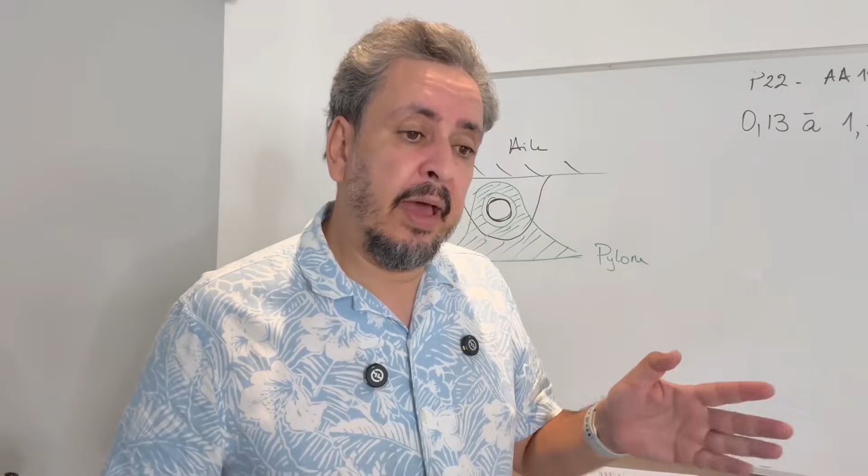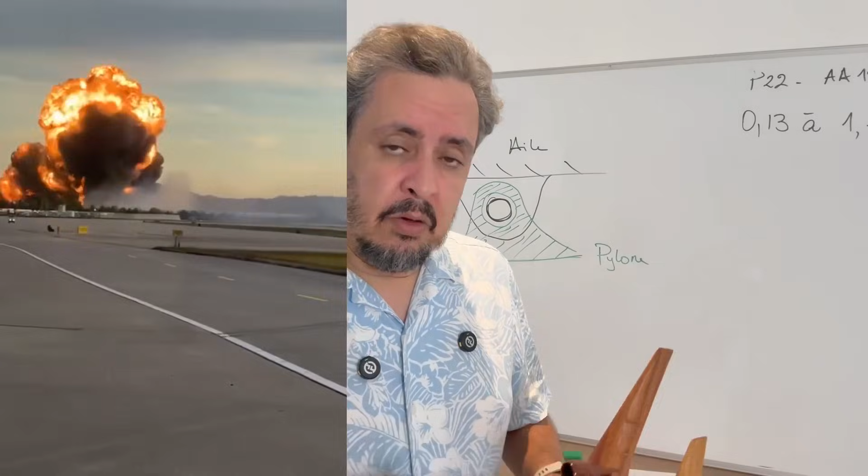My friends, good day. At the beginning of this month, on November 4th, a McDonnell Douglas 11 aircraft, a Trijet, belonging to United Parcel Service, crashed during takeoff from Louisville Airport. It was taking off from runway 17R, and we all saw the footage. During takeoff, there was a fireball near the left wing. The aircraft had trouble gaining altitude, and afterwards it came back down to the ground and crashed. It's a tragedy that killed 14 people: 3 in the plane, the co-pilot, the captain, and another extremely experienced co-pilot, plus 11 people on the ground, and some injured.

Since then, several things have happened. First, the Federal Aviation Administration has banned all remaining McDonnell Douglas 11s. I want to say they're all used for cargo now—today there isn't any airline that uses this kind of aircraft for passenger transport, so the companies that use this plane had to put it away. It's literally grounded. It happened so suddenly that, for example, there was a United Parcel Service McDonnell Douglas 11 that was taxiing to take off, packed with freight and everything. The guys get to the runway entrance, and then they receive a message telling them to turn around and come back immediately. The plane can't fly, so that's where we are.

FedEx uses the McDonnell Douglas 11 internationally, while United Parcel Service only uses it for local destinations in the United States. By the way, the flight was going from Kentucky, the United Parcel Service hub, to Hawaii, but still within the United States. At FedEx, for example, they use it internationally. I saw a picture earlier of a FedEx McDonnell Douglas 11 and it looks like it's stuck in Japan. So do they have other McDonnell Douglas 11s stuck all over the world?

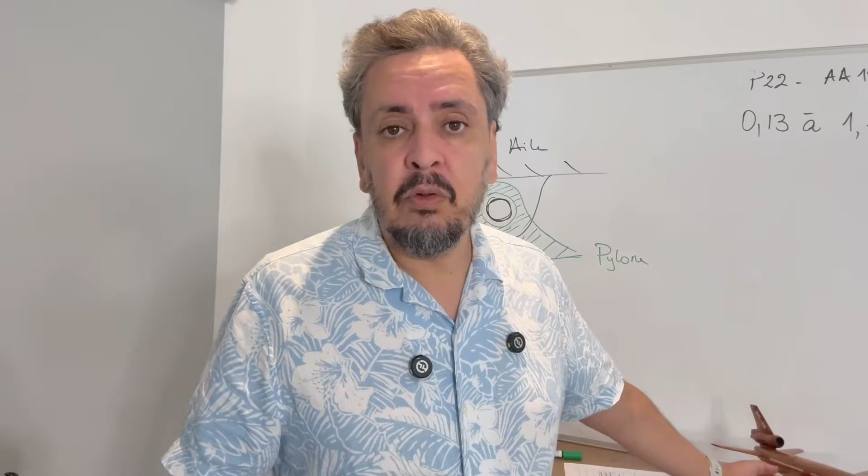Is it going to fly again or not? We don't know at this point, but it might be the end for that aircraft, because even before this accident, it was already heading toward the end. It didn't have many years of service left. Except that now, with this shutdown, millions have to be spent to get them flying again, to restore the safety of these planes and put them back in service. Is it worth it? A decision must be made, but sometimes it's not. If the plane only has 3, 4, or 5 years of expected life left, you're not going to spend millions to bring it up to standards so it can fly again. Maybe it's time to get rid of it.

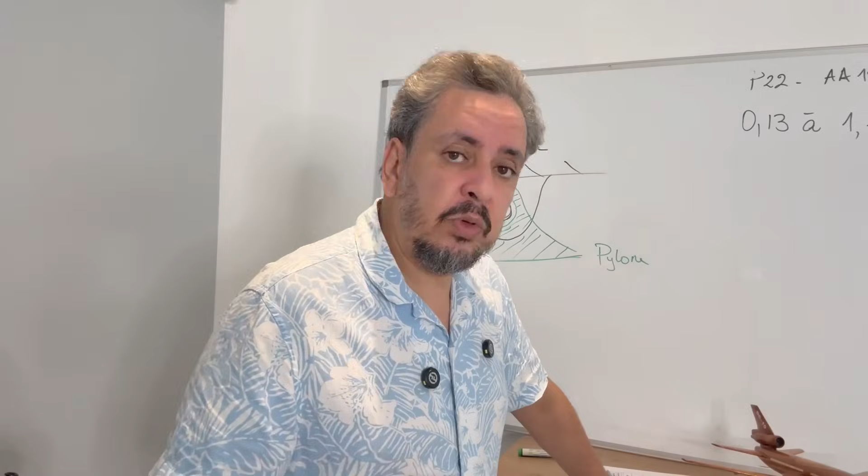An interim report was issued by the National Transportation Safety Board. It's a progress report, as they say. At this point, there's no analysis or explanation, just the first elements of this investigation given in bulk. We know today that during the acceleration, it happened completely normally—the aircraft accelerated along runway 17R completely normally, up until the moment of rotation, the moment when it lifts its nose. At the moment it lifts its nose, the wheels leave the ground.

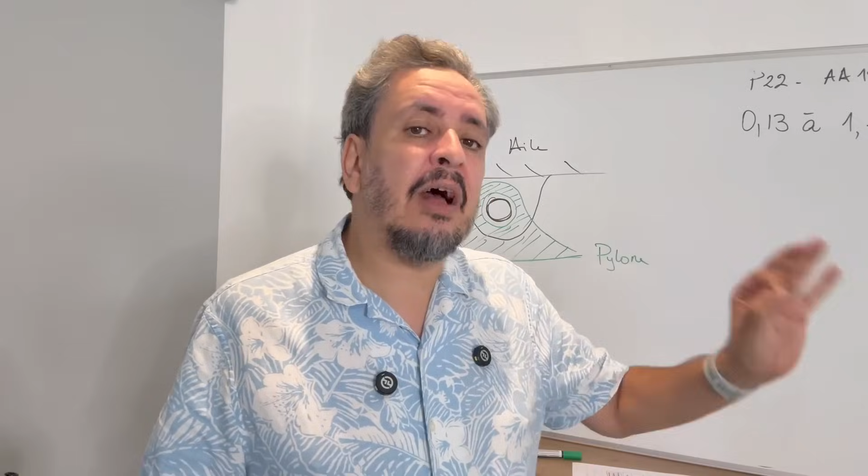And then the left engine comes off—engine number 1 tears away. A key detail is that it detaches with its pylon, which is actually the opposite of what you might think: it's not the engine itself that tore off, it's the engine's pylon that tore off from the wing, so the engine left with the pylon. You can see it rising almost vertically, flipping over the wing. It goes up almost vertically because it still has a bit of residual thrust. It's on fire, that's fuel. Then it goes above the height of the vertical stabilizer, the vertical fin, and falls back down afterward. The plane reaches about 10 meters or 30 feet according to the National Transportation Safety Board. It reaches the end of the runway. There's a barrier that it's going to fly over, but it won't be able to climb much higher.

A few questions remain, mainly why this engine tore off during takeoff. We remember, for those who saw the video about 2 years ago, American Airlines Flight 191, a DC-10. The McDonnell Douglas 11 comes from the DC-10—it's a stretched, modernized version with a lot of the same technical choices. At the end of the 70s, there was this DC-10, American Airlines Flight 191, in Chicago. During takeoff, at the moment of rotation, engine number 1 tore off in exactly the same way and flipped over the wing. The aircraft then stalled. There was maybe a small detail I mentioned last time: the leading edge slats retracted, and then the pilots followed the procedure, and that's what actually killed them.

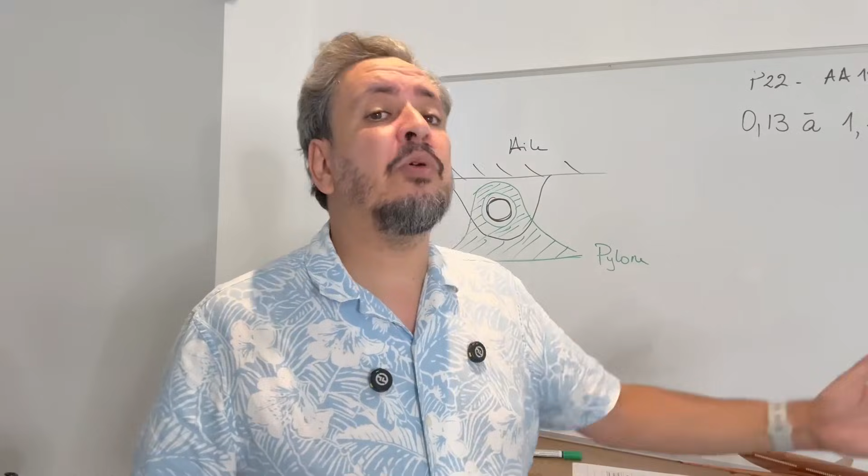But they would have needed to know, they didn't know, they would have needed to know the extent of the damage. They would have needed to know that the slats were retracted. They would have needed to know the engine was gone. But you can't blame them for following the procedure that was published at the time, for following their training.

But the fact is that in theory, this crash of American Airlines 191 was not absolutely necessary. It wasn't mathematically necessary, it was avoidable. Except when you add the layer of procedure on top of it, there you go. It caused a disaster with, if I recall, 271 deaths. It's the most serious plane crash in United States history so far.

I was saying that during American Airlines 191, the engine came off during rotation. On the UPS plane, the same thing happened at the moment of rotation. The engine tore off. Why exactly at that moment?

Actually, it's very likely that it's an effect of torque or gyroscopic force. Why? Let me tell you. Maybe I'll show you with a fan like this.

So here we have a fan. I won't turn it on because then the microphones will pick up only that. Imagine it spinning and I suddenly tilt it upward. This is a plastic fan, but imagine it's made of metal, really heavy and spinning very fast. Well, it has a gyroscopic moment, there's resistance, and when I tilt it upward, it will tend to move sideways.

Following at 90 degrees in the direction of rotation, you get the same effect if you take a bicycle wheel, hold it by the axle, spin it as fast as you can, and then try to tilt it. Change the axle's direction and you'll see there is a tendency, strong resistance, and resulting lateral forces. So that's a gyroscopic effect.

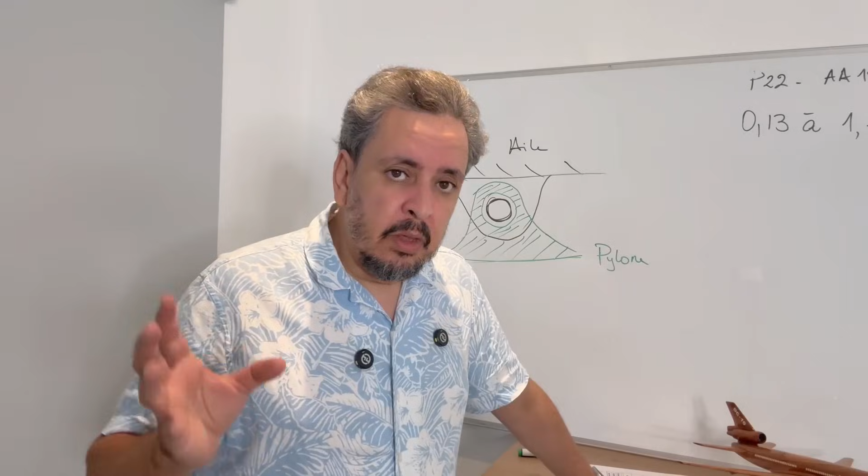The pylon attachments to the wing were supposed to be thoroughly inspected between 28,000 and 29,000 cycles. If we do a rule of 3, we see that it's a way of saying they should have been inspected in the future, roughly 140,000 flight hours, and the plane will probably be 50 years old.

A way of saying that they were designed to never be inspected, because quite simply, airliners never reached that number of flight hours and that number of cycles. They are taken out of service for other reasons long before they reach those theoretical values. So, in reality, McDonnell Douglas had designed these fittings so that they would never be thoroughly inspected.

Yes, regular visual inspections occurred, including one in October, as noted in the interim report. But the fact is, the really thorough inspection was just purely theoretical.

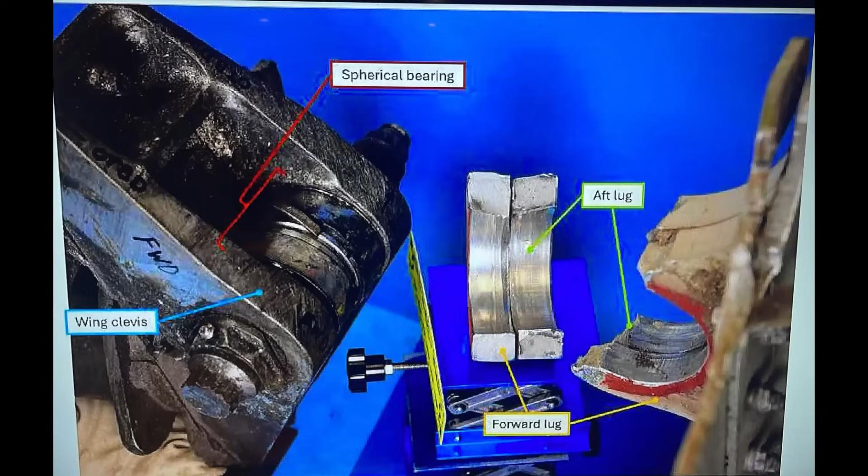What happened? Here we have some extremely interesting images in this report. It's that the reactor, or rather the pylon to which the reactor is attached, broke. It broke a retaining ring, you see. And then from there, the rest followed in a chain reaction.

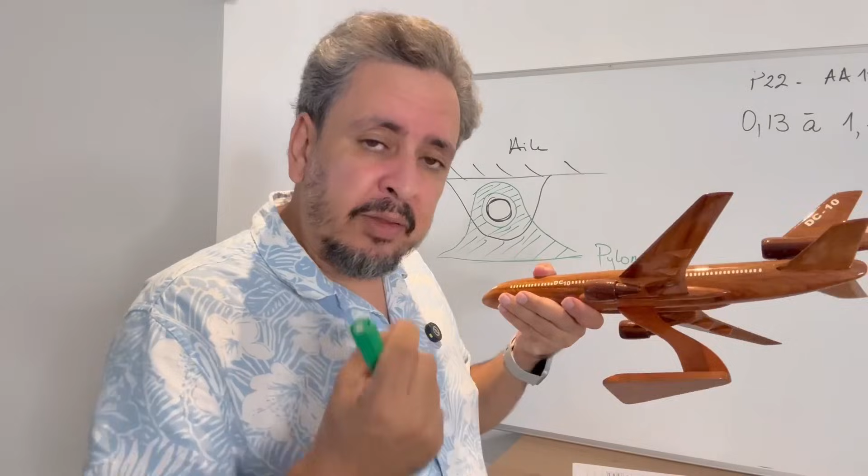So just to show you how the reactors are attached: you have the pylon, which actually attaches at 2 points. That means first the reactor is attached to the pylon, but then the pylon itself attaches at 2 points - there's a spot at the back and a spot at the front. It's not much, just 2 places that allow the reactor to be suspended. This exists on Airbus and Boeing as well, but it's extremely small.

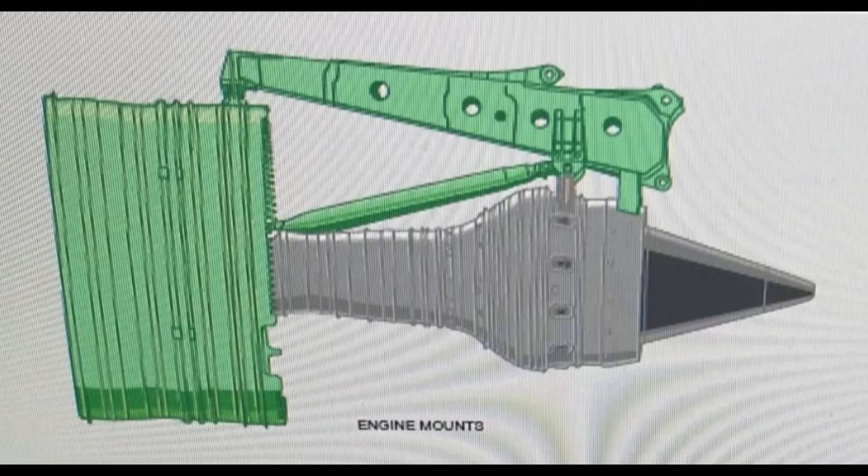There are thrust rods - rods that transmit the thrust. Because actually it works like this: you have the engine that's suspended, attached to the wing. That suspension is for the weight of the engine, to support the weight of the thing. On the other hand, an engine pushes forward most of the time, and pushes backward during thrust reversal.

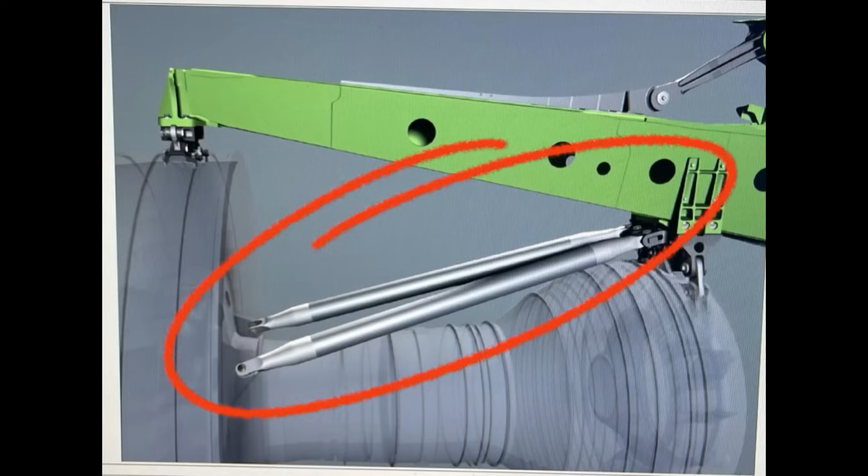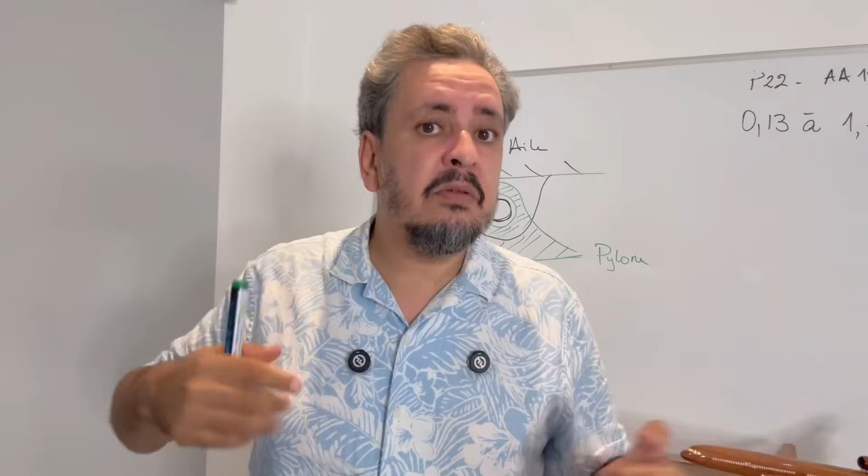And so here, there are connecting rods. They can be either 2 separate rods, or a V-shaped rod, like on the Boeing 787 - I'll show you the mechanism. These connecting rods are able to work when they're stretched, which is most of the time, or work in compression during thrust reversal.

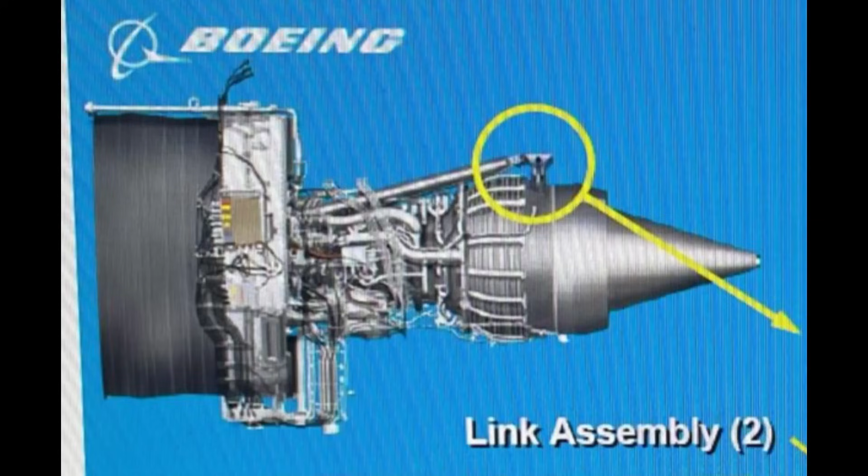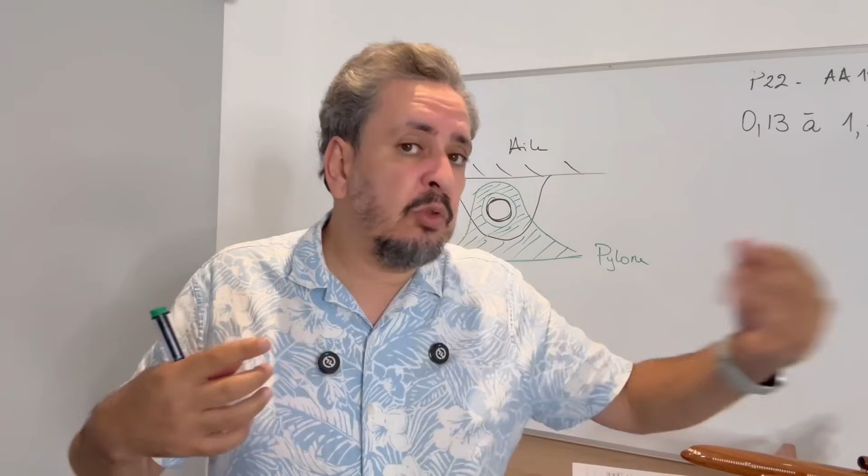These connecting rods attach toward the engine fan - the fan, the blower, that provides most of the thrust. So that's where we find an attachment point, right at the level of the blower. And we bring the bar up to the level of the wing structure to make sure it's secure. This bar will actually handle the axial part of the force, so the thrust from the engine is transmitted through this bar. Each one does a different job.

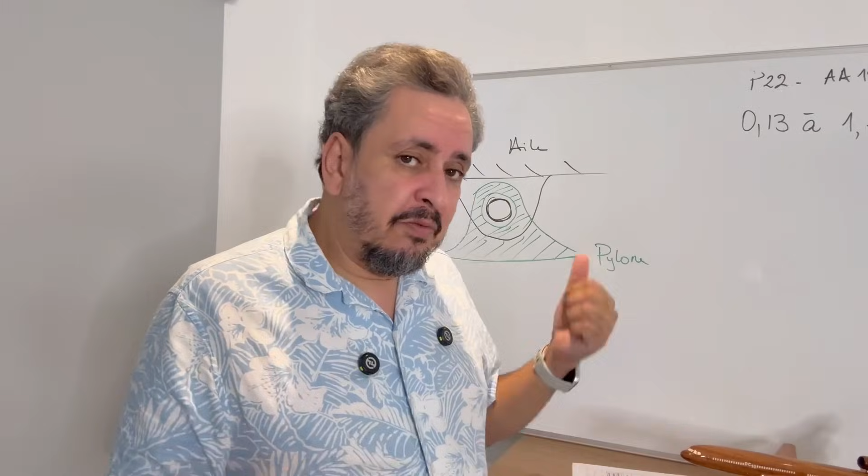The system that highlighted MD-11 comes from the DC-10, and it was already quite criticized back in the days of American Airlines. If you look at the accident report, page 22, the accident report of American Airlines 191, you will see that they describe a problem related to the assembly.

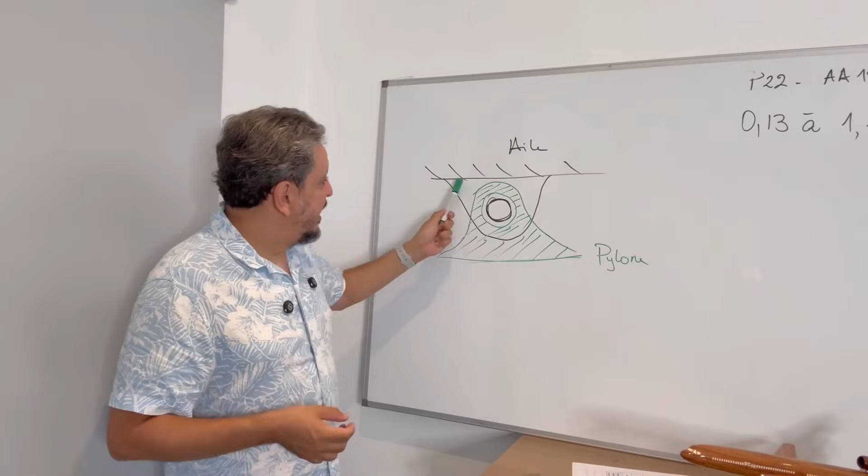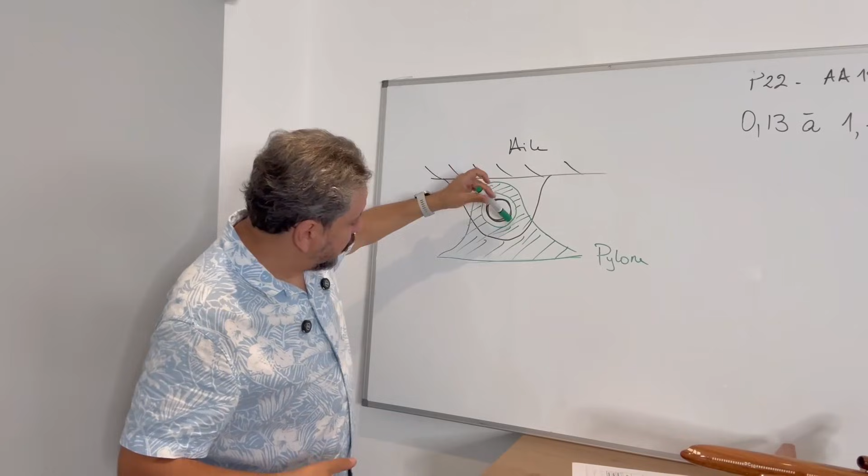When you look here, we have the wing - this in black is the wing, and we have this black part here that allows support of the pylon, you see? So the pylon has an axis here and there's a ball joint. Here at this level, there's a ball joint. Why is there a ball joint?

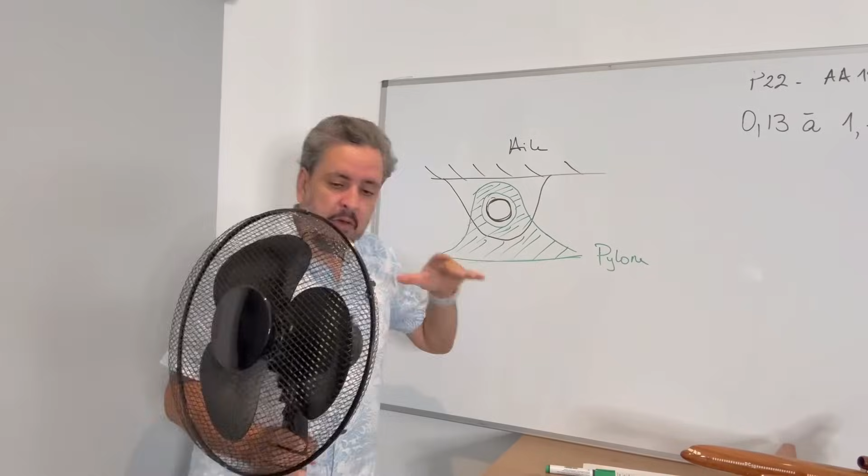The engine, just to give you a 3D view, the engine is like this, okay? The fan is like this - this is the fan. And then we have the pylon that goes up like this and attaches here, okay? In the diagram, we have this green part that belongs to the pylon and the black part that belongs to the wing structure.

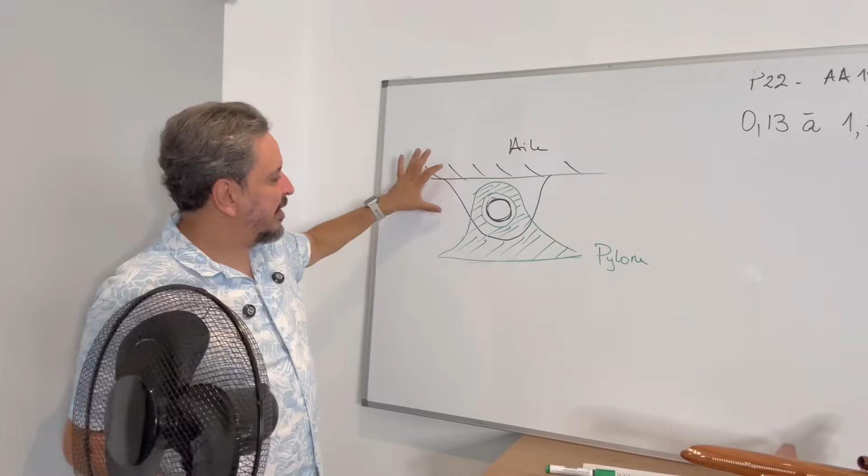And between the two, there's this ball joint assembly. So the ball joint assembly is what allows the engine to move a little bit.

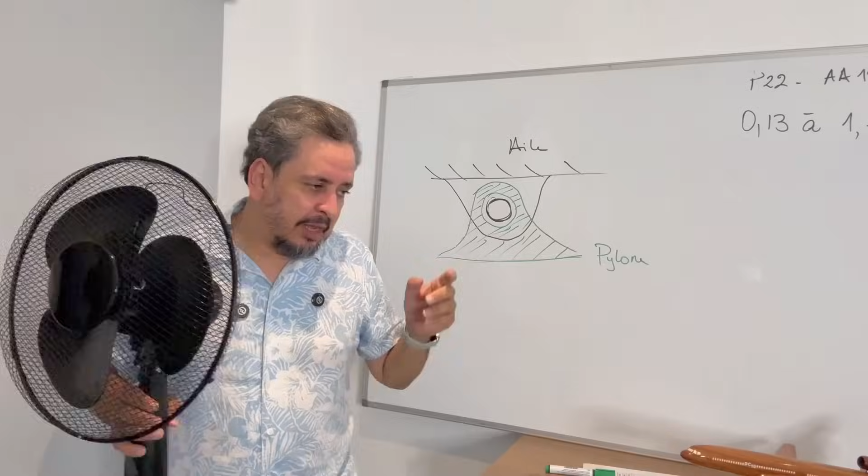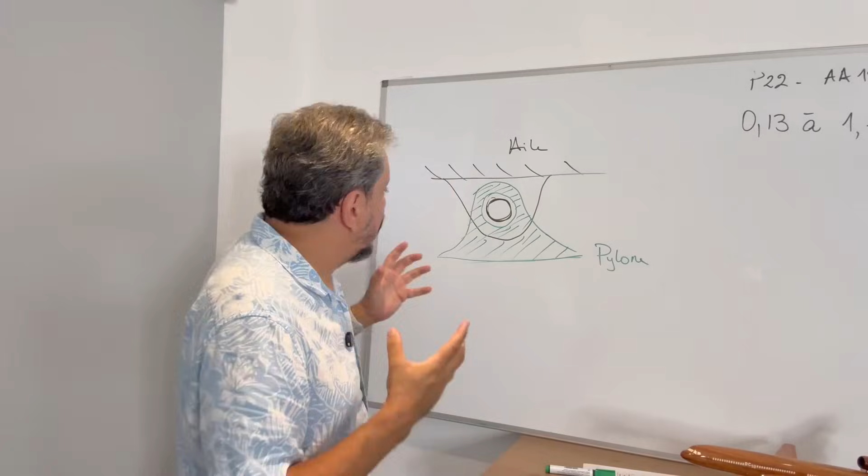You know, when you're on a plane and you look out the window, when there's turbulence, what do you see? You see the engine doing a dance like this, vibrating a little bit. And actually, it's not welded to the wing - it's not held by weld points, it's not really bolted to the wing. It's mounted on a ball joint to allow for some flexibility that lets it move both right and left.

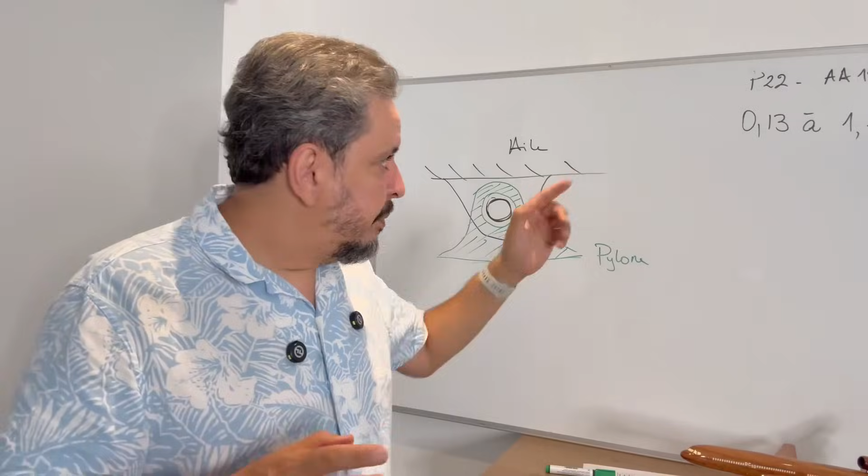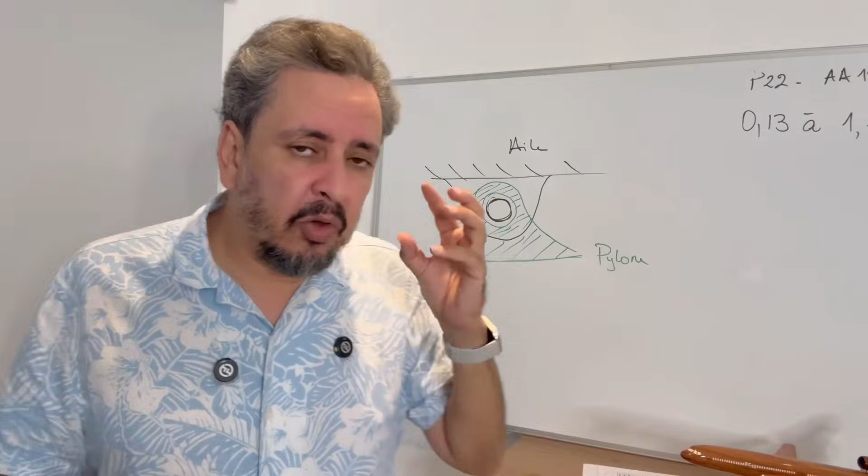That's a small rotation right at the wing pylon connection. So what they discovered back during American Airlines 191 was that this happened on a lot of planes. Since the assembly here doesn't have an extremely clear specification or tolerance from McDonnell Douglas, what was happening was that the distance here could sometimes decrease to the point that it could go further.

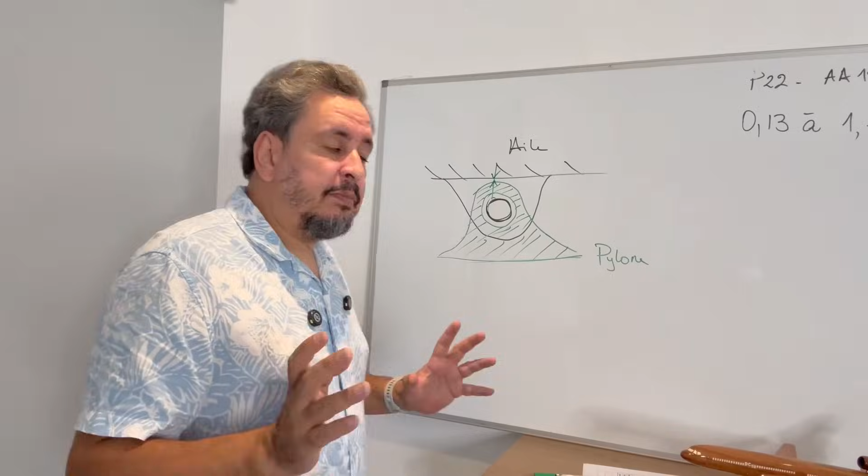When they checked on various planes, they found that it could range from 0.13 millimeters, so a tenth of a millimeter, up to 1.14 millimeters. So it could be between a tenth of a millimeter to more than 1 millimeter. It's still not very precise, you see - with this kind of engineering, it's not precise at all. So look at what happens in cases where the distance is extremely small.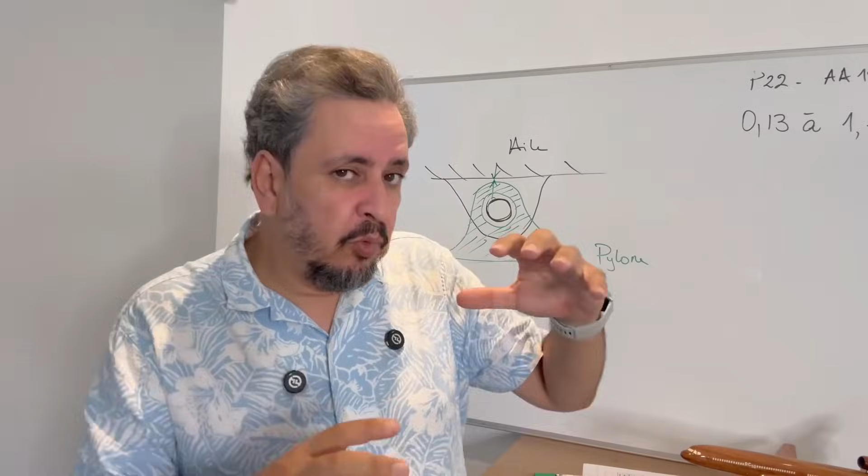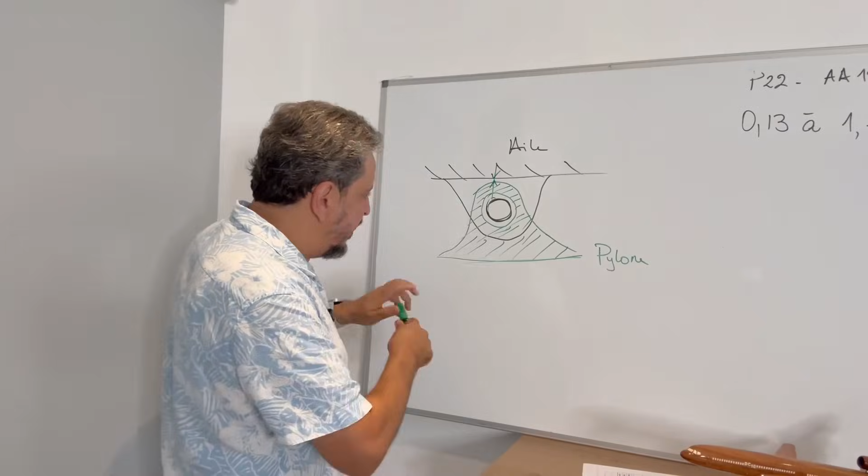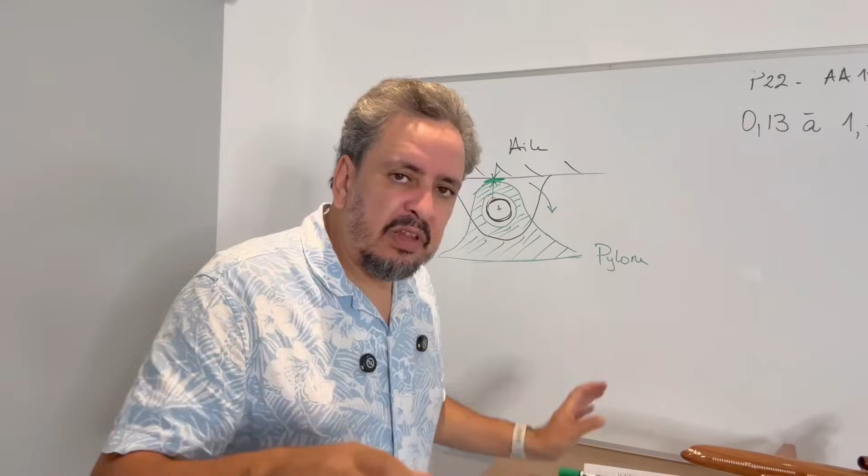These two parts, the green one and the black one, which are normally supposed to be able to move relative to each other along the axis, the ball joint, well, they can come into contact. We can have unwanted contact. So imagine the rotation here: this one turns like this, and imagine, for example, that this end comes into contact. At that moment, we no longer have that flexibility of rotation, of slight lateral rotation.

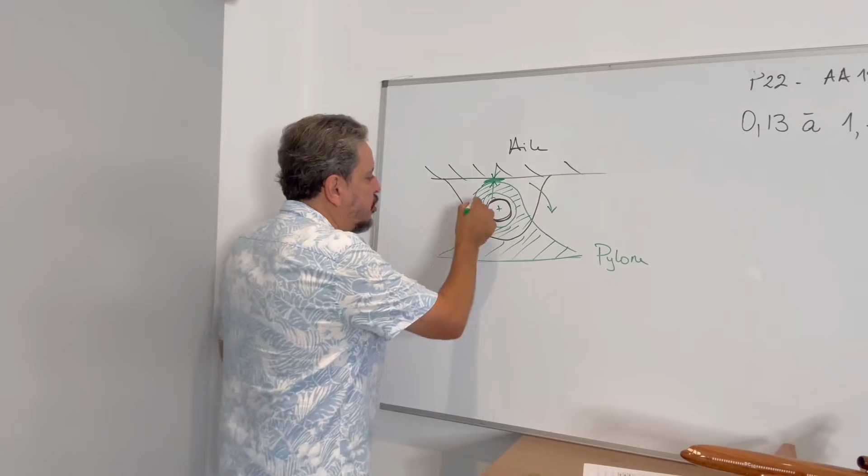So what's going to happen? There's a huge force, a huge pressure effort here, which will be transmitted along these branches and which could potentially break them. In fact, at the time both branches broke, they had been weakened by this, but also by the fact that American Airlines had used a hydraulic jack, a hydraulic forklift, to replace the engine. This, of course, badly damaged the mounts that were just waiting to break off.

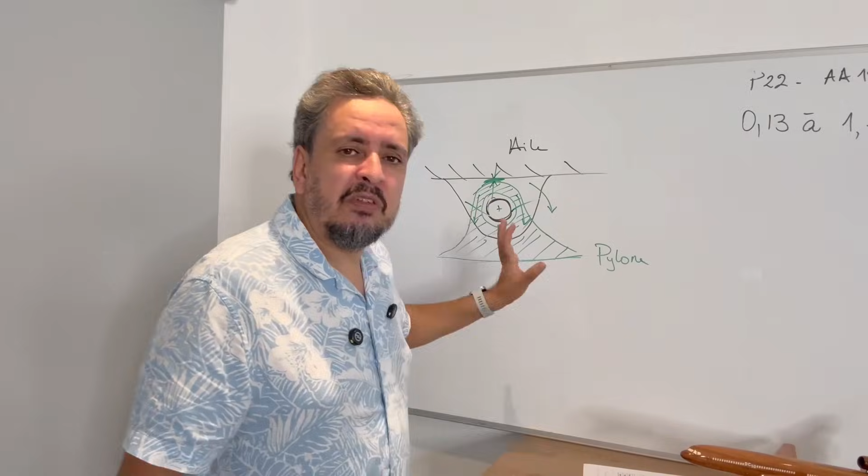By the way, the year before this crash happened, I think it was in 79, in 78 there was a similar accident at Continental. It didn't go as far as a crash, but at one point, while they were installing the engine, they broke the attachments. Normally this should have been reported to the aviation authorities because that's damage to the structure of an aircraft. But what did they do? They just repaired it there, replaced a number of parts, and covered it up. The National Transportation Safety Board blamed them for that in the report on the American Airlines 191 accident.

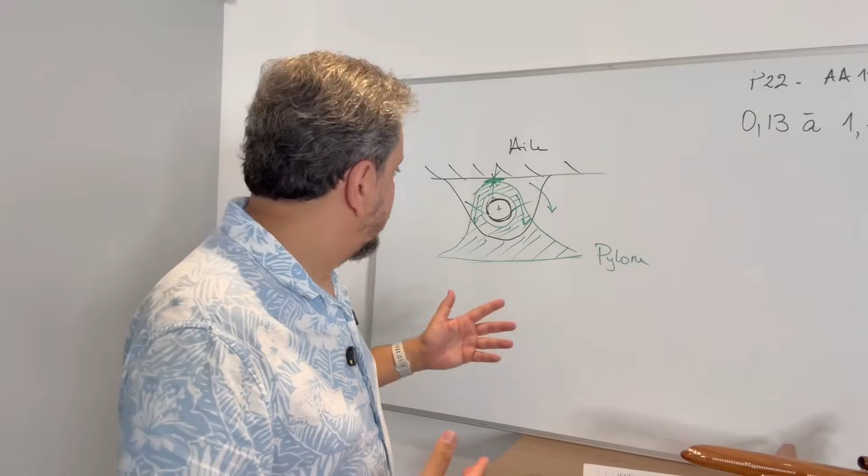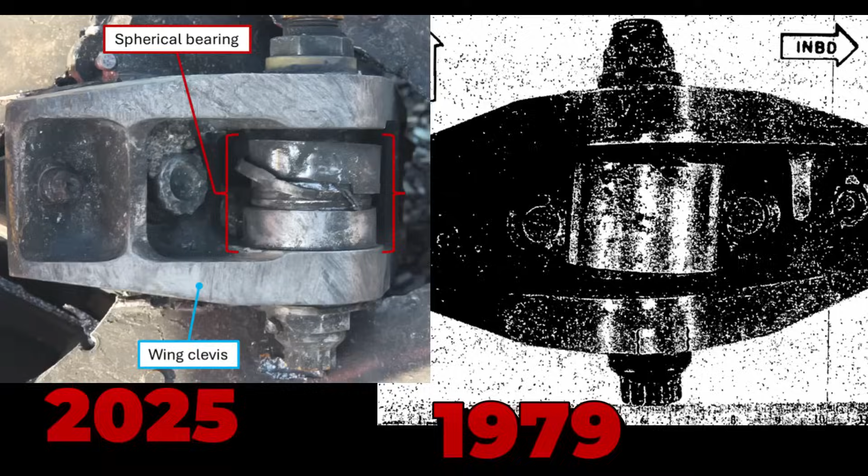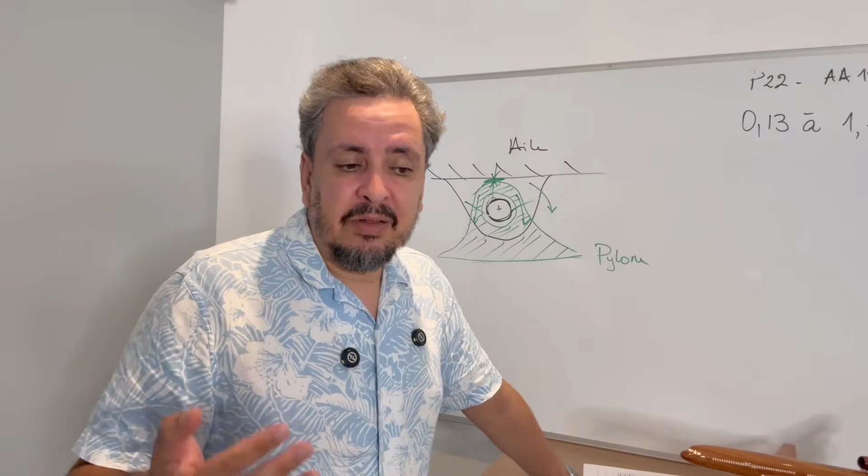So what we have today is this United Parcel Service aircraft that somehow inherited the problems of the DC-10 and brought them back to our time. Today, here we are facing exactly the same accident as in 1979. American Airlines 191 is actually mentioned in the interim accident report and will probably be mentioned in the final report as well. That accident has come back to haunt us in our time.

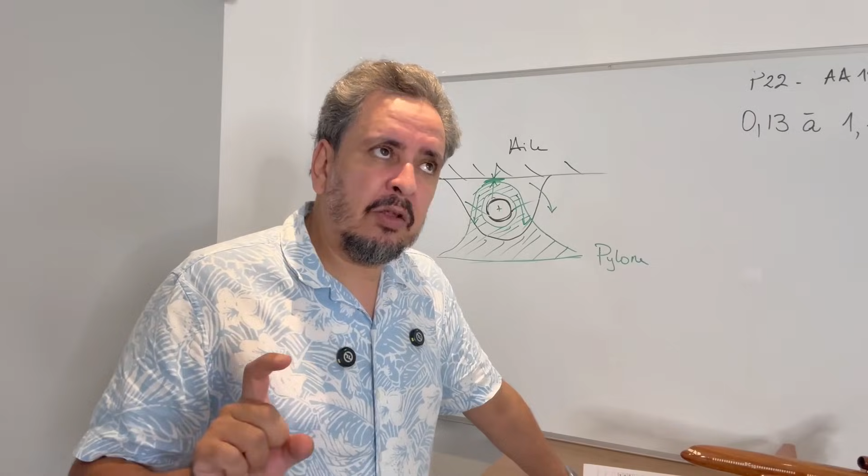Engine loss - but this time, instead of... back then, when there was the engine loss on American Airlines, we decided: what we're going to do is make sure that if an engine breaks off and hits the slats, they won't retract. That's what they did. They changed the configuration of the slats so that if one is broken and there's a hydraulic loss, they won't retract on their own on one half of the wing while they're extended on the other, causing that asymmetric stall.

That problem was fixed. On the other hand, the real problem is the mounting of the engine on the wing, the mounting of the pylon on the wing. That wasn't changed, it wasn't deeply modified. So today it breaks again.

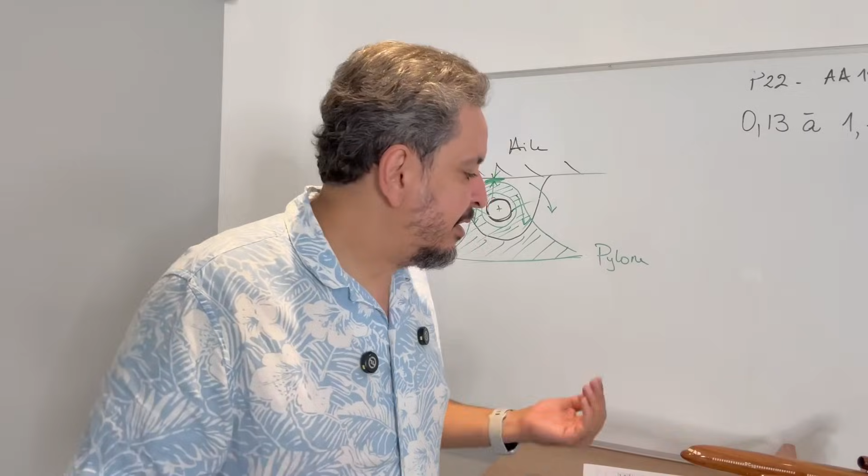So the slats didn't retract - that's true, but that's just from the report, we're not discussing that yet. What we must have had is engine damage. Probably this one tore off. There's fire, there are metal pieces flying everywhere. Probably that engine must have swallowed some debris, maybe this one too. And now we have a plane that's lacking power. That's why it couldn't climb, and so the aircraft can't gain altitude. And what's it going to do? It will come back down and cause the damage I mentioned earlier.

That's it. So that was the progress report on the MD-11 accident of the UPS flight.